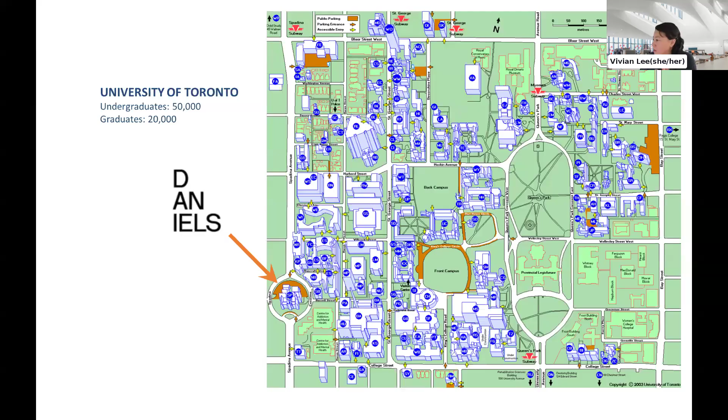I hope you can see the screen right now, where I want to give you an overview. For those of you not familiar with the University of Toronto St. George campus, Daniels is located at the southwest edge of that. It's an exciting school to be a part of because Daniels is part of a larger network, and as you're able to take electives, you'll be able to reach out to a number of other programs and schools across our campus. If you're new to Toronto, it's exciting to be here right now, especially with the World Series going, and hopefully that'll be the case next year as well.

So the number one question - I'm going to dive right into the curriculum because that's the biggest question I get. People often ask me what is the difference between MArch and MArch AP, which is MArch Advanced Placement, and even sometimes the MArch Post-Professional Program. So let me give you an overview.

The Masters of Architecture program is an accredited program, which means it has a curriculum overseen by the CACB, the Canadian Architectural Certification Board, which makes sure that all of you, when you graduate from this program, can begin to log your hours and eventually test for your architecture license. So quite a bit of it is standardized in terms of content across Canadian schools, and some aspects of it are different.

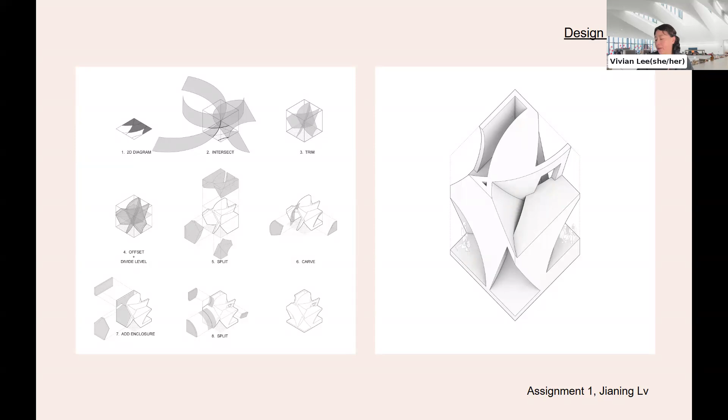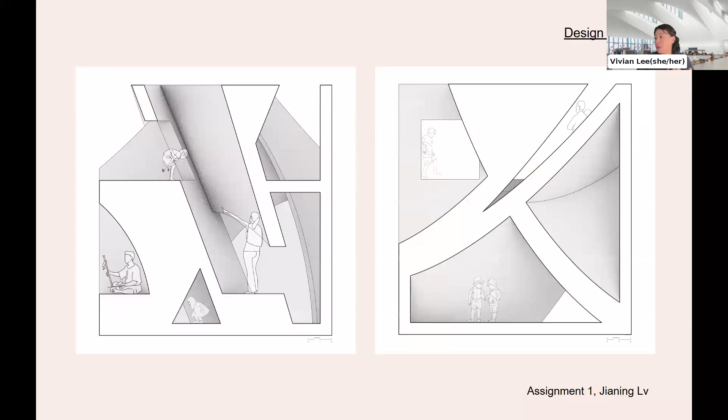The first year is about form making. You're trying to understand ways in which architects organize space. You're going to be thrown a lot of program, a lot of thinking about systems, but there are formal ways in which architects begin to organize space in a way that's clear for use, but also exciting as spatial propositions.

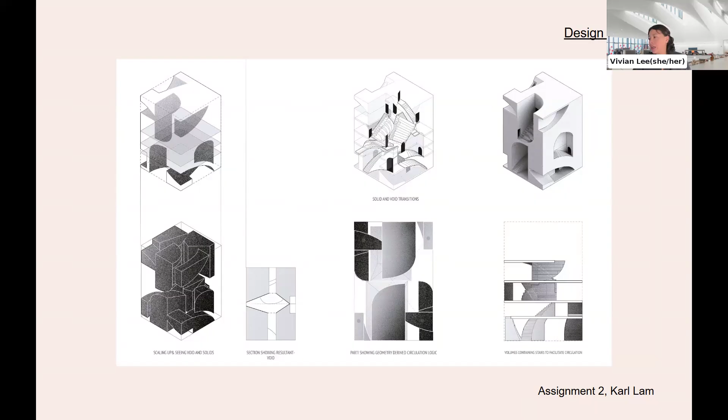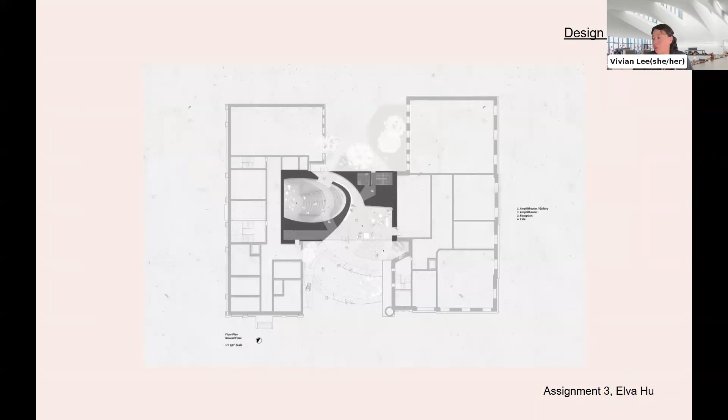So we work through ideas of poche, inhabitable poches, thinking through grids, ways that we organize and plan and think through the dimensions of a body walking through a stair, tight compressive spaces versus expansive spaces. These are short assignments that really deal with spatial organization before you get into your second semester.

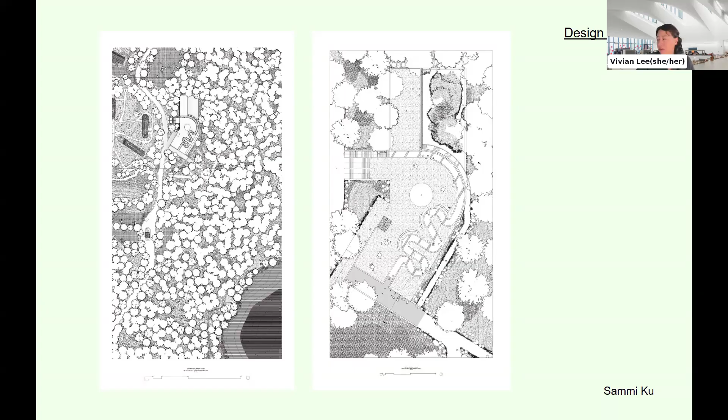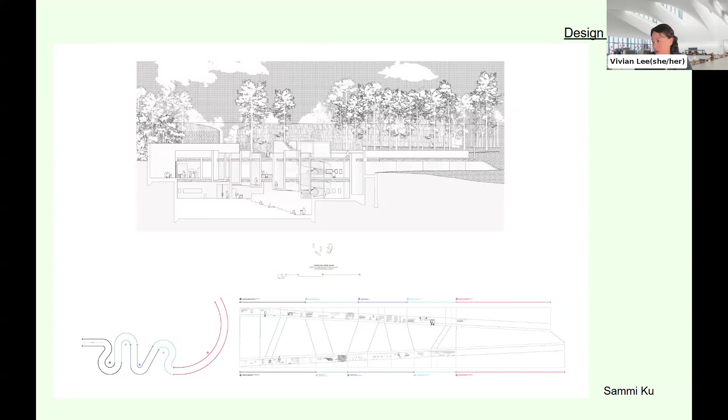The second semester studio mostly deals with issues of site and materiality. Here we are thinking about the lens of site in ways that are not just a colonial settler lens, but site actually has much deeper meanings, especially to our indigenous peoples. There are ways in which we think about site that is broader and try to bring in indigenous concepts, both to site and to material use.

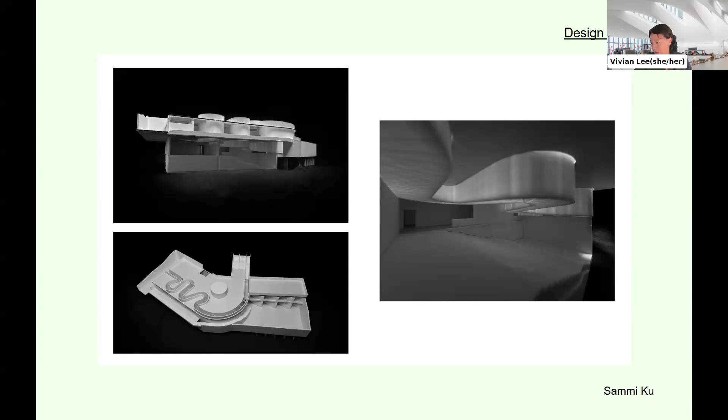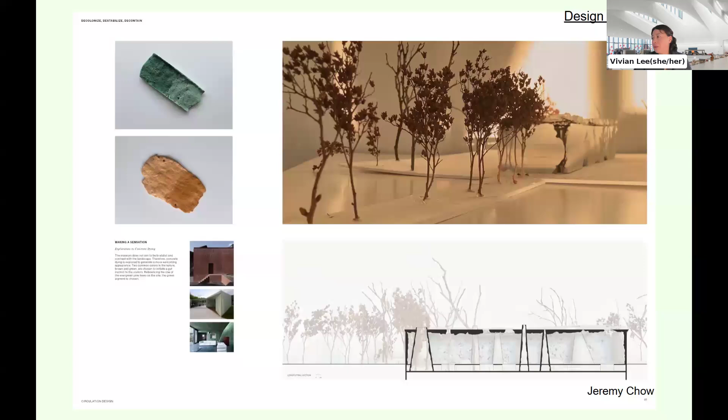Students work on a project that's in the landscape, dealing with topography, dealing with ecology and the cycles of time and nature, and then working through materials while building in these ecological sites. What are responsible materials? What are the materials that are locally sourced? But from there, how do you manipulate and think through material properties to invent and design something maybe novel, inspired by materials? So these have been projects that deal with that.

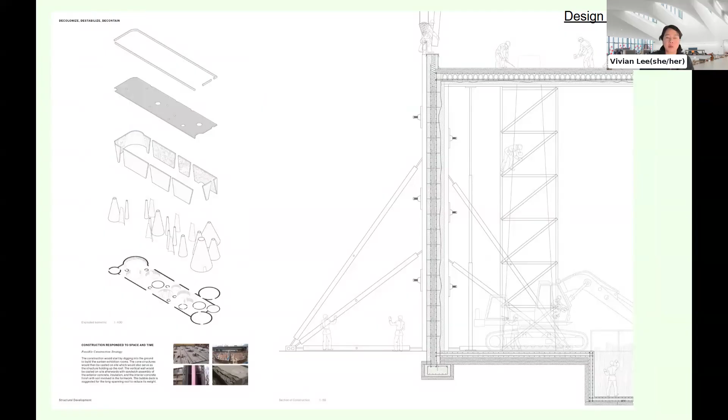And it's the beginnings of you having now had some building science to be able to think through materials into a constructible system, which we also emphasize in this studio.

The third studio, we now are in Toronto, and it is called an integrated urbanism studio. It's great, we found, for people coming in as advanced placement who are new to the city. Here we're really studying something about the greater Toronto area. This year, it has to do with housing specifically—there's been new codes that are allowing for major avenues to have 6-story apartment buildings. What are the implications of that alongside its issues of landscape?

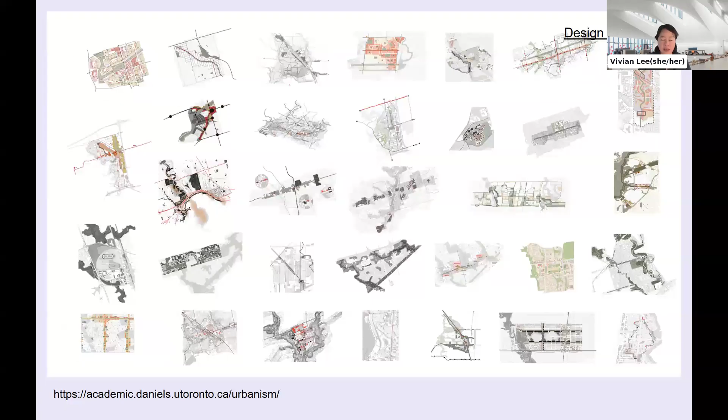So this is a course where the landscape students are doing the same exact sites, so are the urban design students. Everybody comes together to work on the same site, which is really mimicking how it works in practice. Architects do not actually design alone—we design with many other disciplines, and we look through their lens, our lens, have these knowledge exchanges in order to inform our design decisions.

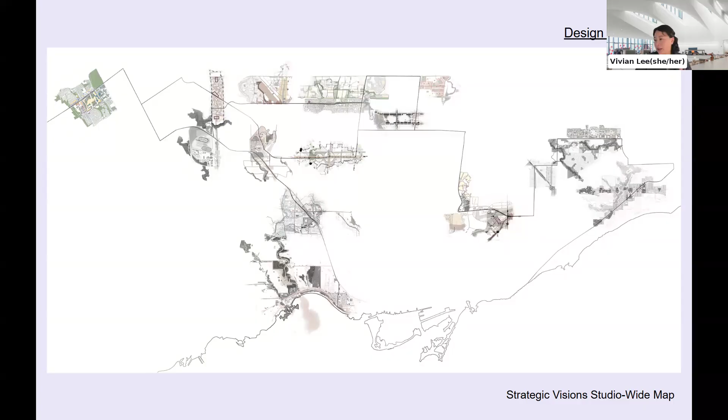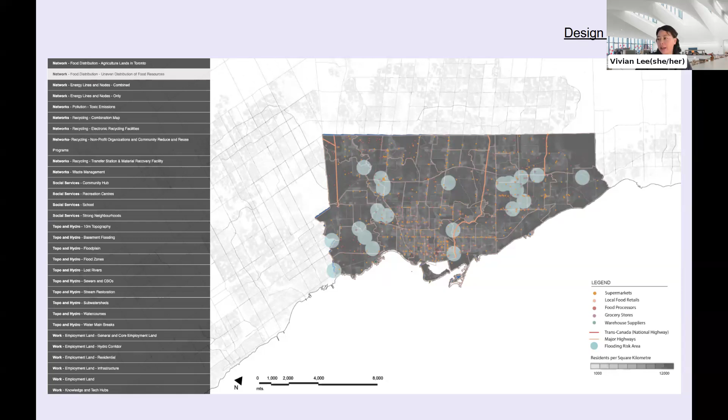So here students are learning GIS, which is geospatial data, about demographics, about walkability, infrastructure, trying to understand floodplains—all of these things at the same time, like where are the main bike lanes, but where are all the sewage outfalls. Those are understanding the collapse of systems and how to design at the scale, also site related, but urban site, with data information.

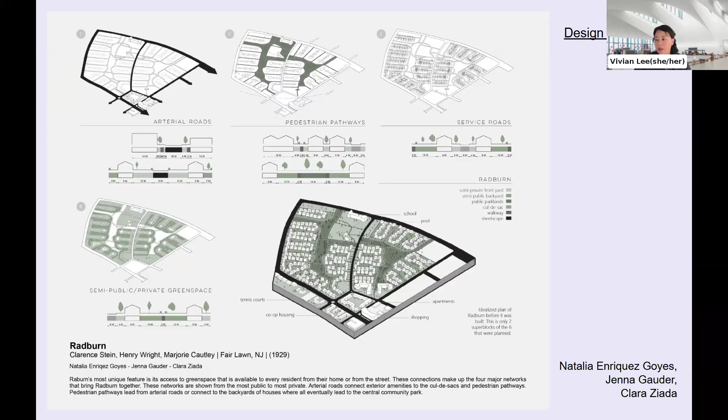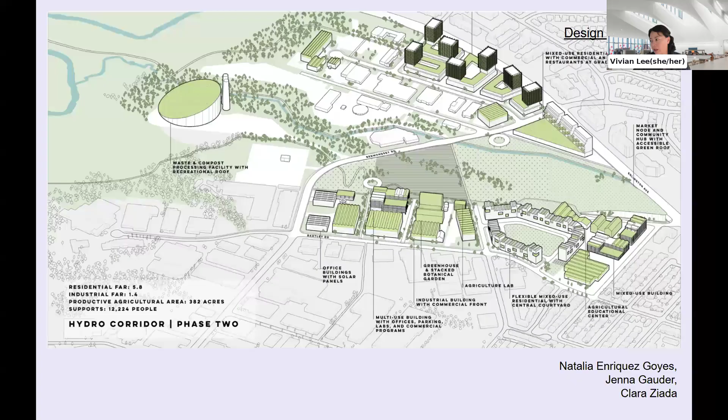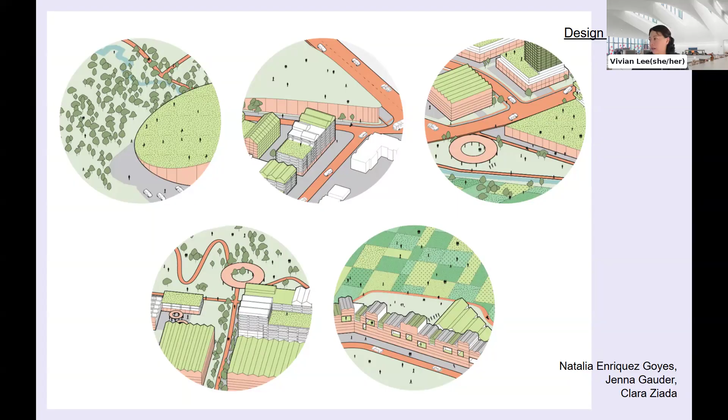And so you can see the scale of this is kind of zoomed out, where you're really understanding how to master plan to some degree, but also in this year, actually, we're getting down into the housing as a system to think about issues of affordability, issues of growth and densification, and the missing middle in Toronto. Here, you're working with a lot of policy, and for final reviews, we actually often get current practicing professionals, city planners, people who are working on these same topics, and they're always very exciting and fruitful conversations.

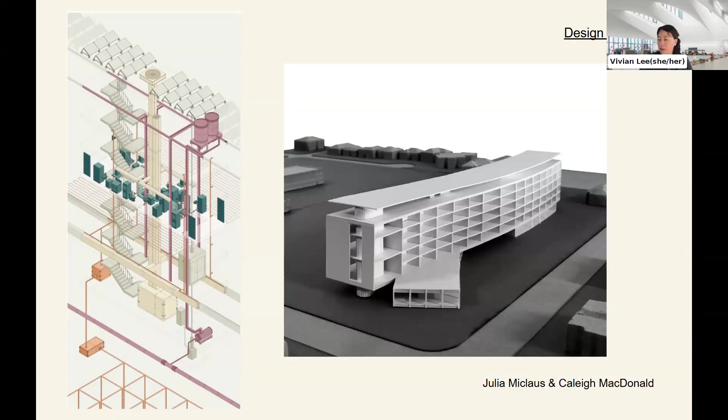In the final comprehensive studio, if you're shopping around for schools, I think we all have a comprehensive studio. This is the place where you're integrating all of your building science knowledge—structural systems, mechanical systems, envelope design—all into a building. At our school, we also mandate that you consider what it means to build in a low carbon environment, so there are reports and analysis thinking about the net energy use of your building, which is really the only way to build going forward.

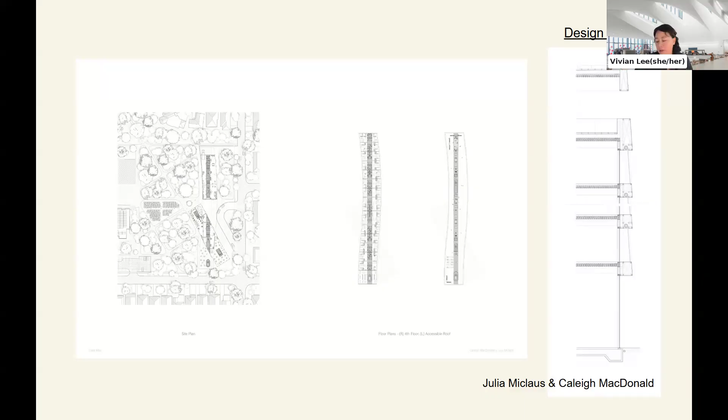This is a balloted studio as well, so prominent faculty members who practice right now, alongside partners of large firms in Toronto, come run each section. We think of it as almost a competition in real life. There's a brief, there's a project, and each studio has its own lens based on the instructor and their expertise on how they want to structure their section. The deliverables are completely the same across the board, and you choose and ballot for which instructor you want to work with.

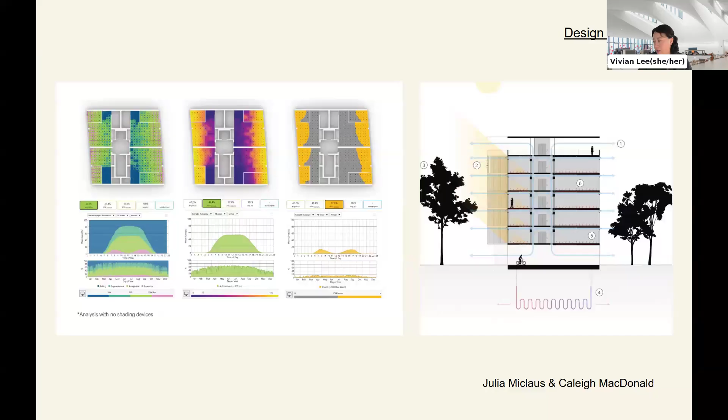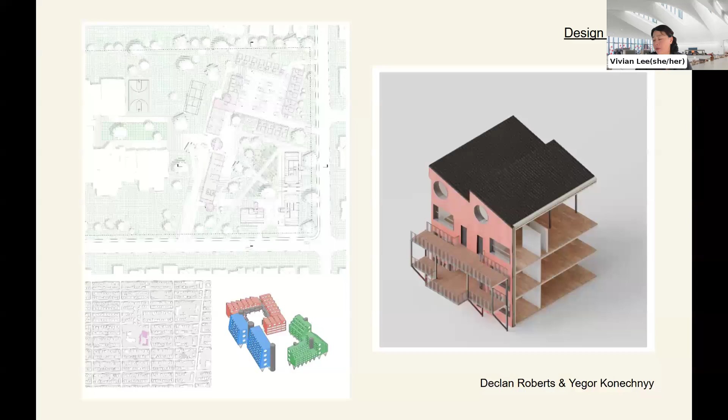Here you can see the kind of reports and analysis that we expect students to perform in order to understand issues of daylighting, issues of energy loss, and even ways that materials can contribute to the overall sustainable maintenance of the building.

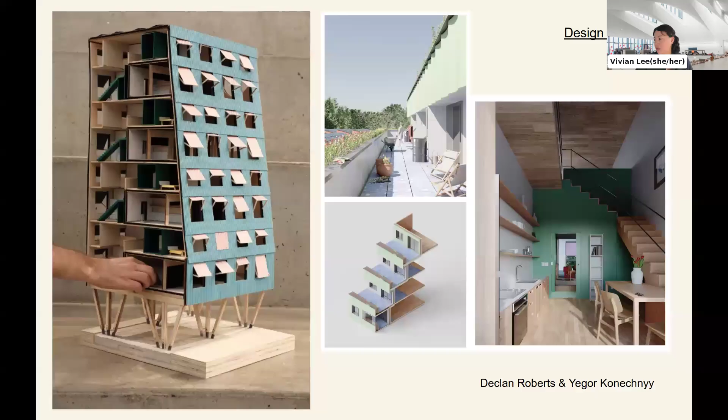This is a paired project, and I think it's one of our most exciting projects in terms of output and also robust conversations with practitioners in studio. And then here, I just want to show you what the other courses alongside comprehensive are asking you to deliver—so whole life cycle carbon emissions estimates, things of this nature are in sync, and that fourth term is synced up across building science and studio class.

Finally, option studio. I'll just have Alex or Gwen drop in a link of where you can find the current option studios. Our current Gehry chair is Yusuke Obuchi, who is from University of Tokyo and was the Venice Biennale Golden Lion winner for some of his amazing digital fabrication projects—digital fabrication with humor, I would say, and working on what it means when there's error in fabrication.